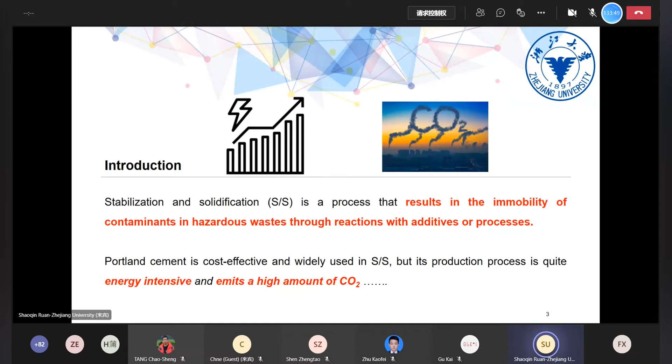So first about the introduction. As we all know, SS, or stabilization and solidification, is a process that results in the immobility of contaminants in hazardous wastes through reactions with additives or processes. And we all know Portland cement is very cost effective and widely used in SS. But its production process is quite energy intensive and emits a high amount of carbon dioxide. Nowadays we try to achieve the goal of carbon neutrality. So if we use too much Portland cement in SS, it is not quite environmentally friendly. So we should search for other materials that are low carbon.

And I will show you 2 figures first. First is about the materials flow of ordinary Portland cement manufacturing. First you need to get some raw materials to produce cement. I know it is quite boring, but I want to introduce this first. You need the lime, alumina, silica, and iron oxide. Then you need crushing, grinding, and blending to make the blended mixture. Then the very important procedure, that is calcination, and you get some clinkers. Then finally you add some gypsum to produce the commercial Portland cement products.

And we all know the carbon dioxide emission can be divided into 2 parts. The first part is the direct carbon dioxide emission. The second part is the indirect carbon dioxide emission. The direct carbon dioxide emission comes from the calcination of carbonates, the calcium carbonates. And the indirect carbon dioxide emission comes from the use of fuels. If we use some coal or some natural gas, it will produce some carbon dioxide.

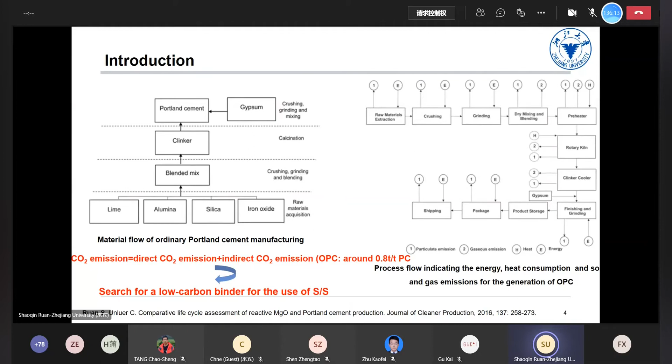And the second figure is about the process flow, indicating the energy, heat, or gas or solid emissions for the production of OPC. It shows the energy you need to input, and also the gases or solid wastes emitted during the production of OPC.

Here comes the question. Are these so-called low carbon binders or industrial wastes really low carbon? So here we need to use the very powerful method that we call life cycle assessment. Life cycle assessment can be divided into 4 parts. The first is the selection of the boundaries of scope and system during an LCA. The second part is searching for first-hand or second-hand inventories of a product or process. Then there is the evaluation of the obtained data using an impact assessment method. Finally is the interpretation of outcomes and providing recommendations for improvement.

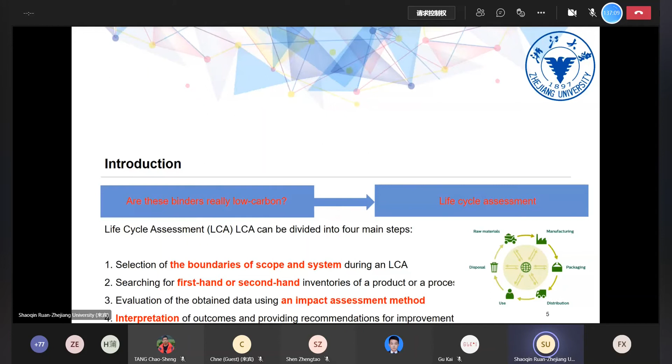So there are numerous methods that we can use to evaluate the environmental impacts of materials or procedures. The most widely used ones are Eco-indicator 99 and IPCC 2013. With Eco-indicator 99, you can get a number of midpoint categories such as climate change, radiation, and land use, and these environmental categories can be further categorized into 3 groups: damage to human health, damage to ecosystem, and damage to resources. After you get the endpoint results, you can weigh these values, and finally you get the interpretation. And IPCC 2013 is usually used to obtain the carbon dioxide emission during the production of certain materials or a certain process.

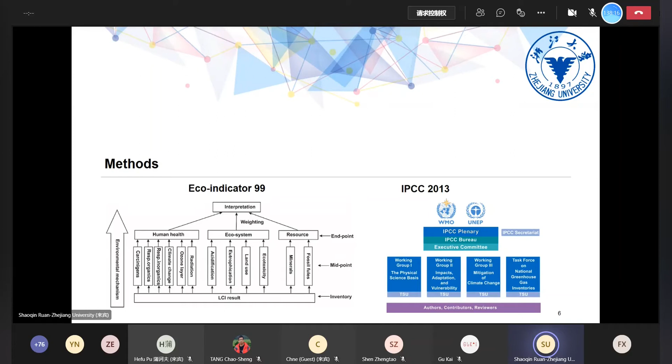So still, of course, we need to first talk about the ordinary Portland cement. This figure is about the normalized impact categories with respect to climate change set at 100%. As we can see from this figure, fossil fuels are identified as the largest impact category to produce OPC in the USA and Europe. But due to confidentiality issues, China's actual carbon footprint due to cement production is still not fully known.

So in terms of this, we have several measures to increase the sustainability of OPC, or Portland cement. The first is about energy type and efficiency. We need to increase this, for example, by using lower carbon fuel like natural gas. The second is we need to increase efficient grinding and conversion from a wet to a dry process. The third method is the replacement of out-of-date kiln lines or introduction of high volumes of supplementary cementitious materials.

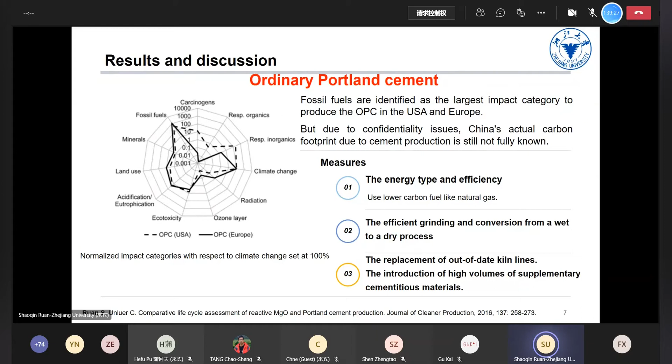Okay, so previous speakers also mentioned some binders like alkali-activated cement, and actually this type of cement is quite popular in my research area. Nowadays, numerous researchers have investigated the performance of alkali-activated cement, whether used in concrete or in S/S. So I want to give a very brief definition of AAC. Alkali-activated cement is considered to be a more sustainable material than OPC, which is produced by a reaction between aluminosilicate-rich materials and alkaline activators.

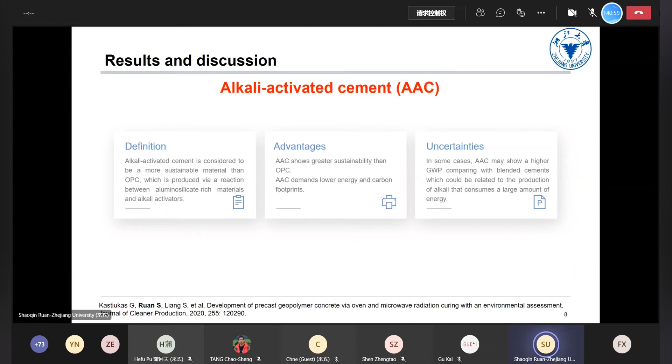In terms of its advantages, AAC shows greater sustainability than OPC, and AAC demands lower energy and carbon footprints. However, there are some uncertainties. In some cases, AAC may show a higher global warming potential compared with blended cements, which could be related to the production of alkali that consumes a large amount of energy. As we know from the definition, to prepare alkali-activated cement, you need a large volume of alkali, and its production process may be energy intensive. So it further adds environmental burdens to the whole process.

The second part is about magnesium-bearing cement. First, I will briefly introduce MgO, because MgO is the major component used in magnesium-bearing cement. Magnesium oxide is produced from the dry route, which is the calcination of magnesite. As you can see from this equation, it will produce magnesium oxide and carbon dioxide. The second is the wet route, which obtains MgO from seawater, brine, or rejected brine. You need some alkaline bases to produce magnesium hydroxide first, then you calcine these products to produce MgO.

But from our experiment, we find that MgO produced from the dry route has an advantage over MgO produced from the wet route in terms of overall sustainability. You can see from this figure, the left one, MgO from the dry route has a lower single score compared with MgO from the wet route. However, in terms of the dry route, the major magnesite production country is China. So if you want to use MgO from countries other than China, transportation is needed, and it will also lead to some environmental impacts.

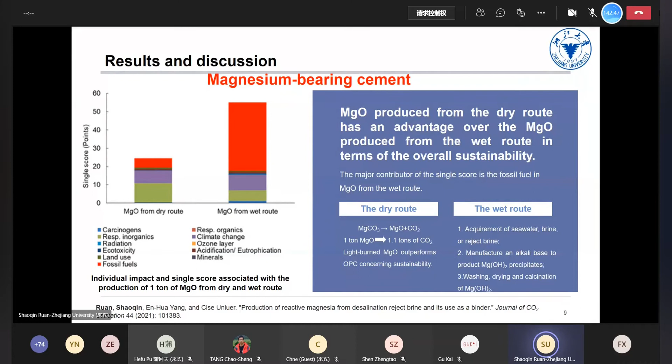Then, there are several types of magnesium-bearing cement, for example, carbonated MgO cement, magnesium-silicate-hydrate cement, magnesium phosphate cement, magnesium oxychloride cement, and magnesium oxysulfate cement. Magnesium phosphate cement, magnesium oxychloride cement, and magnesium oxysulfate cement all reveal rapid setting and hardening properties, which is quite useful in the process of S/S. So they are commonly used in a lot of applications.

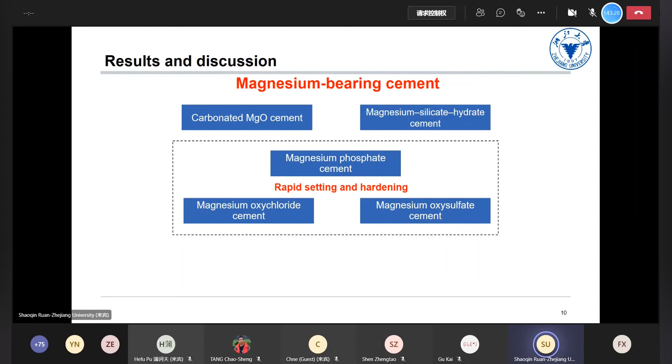First, about carbonated MgO cement, we published a lot of papers in this area. As we know, MgO cement acquires compressive strength via sequestering carbon dioxide. This leads to a reduction in pore volume and improvement of the microstructure. The carbon dioxide can be permanently captured in the form of stable hydrated magnesium carbonates. However, the carbon dioxide sequestration potential of MgO used in S/S in a natural environment is still unknown due to the lack of a geochemical model.

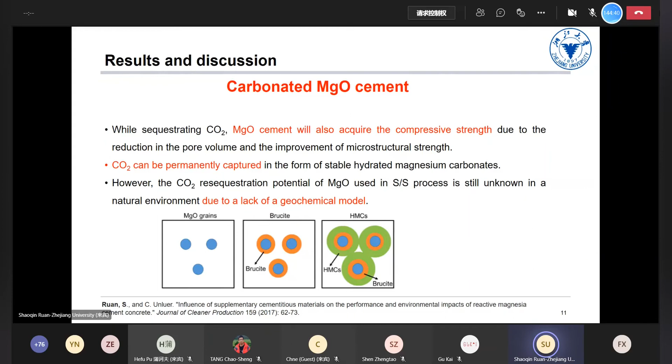And previous speakers also mentioned MICP. MICP is also quite a popular research direction in this area. It uses bacteria and some calcium-bearing salts, like calcium chloride.

Previously, we also conducted some research regarding the use of MgO in MICP. We introduced reactive magnesium cement and bacteria to produce hydrated magnesium carbonates to solidify these sands. The results are quite good, and I think it is a very promising field.

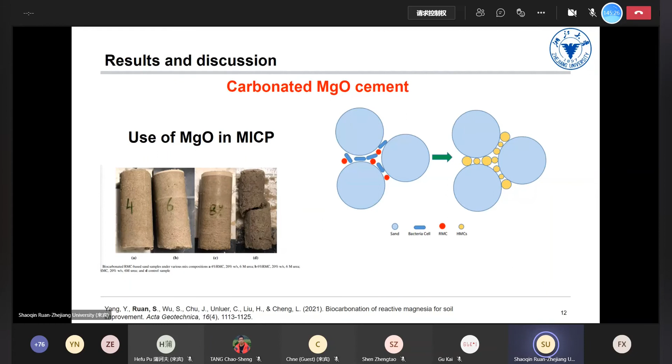Then there is magnesium-silicate-hydrate cement. Magnesium-silicate-hydrate cement can be synthesized by the reaction between MgO and a silica-rich source, such as microsilica and rice husk ash, in the presence of water. Sodium hexametaphosphate, instead of PCE, is used as a water reducer. However, when you use this water reducer, it may add additional environmental loads to the MSH binders.

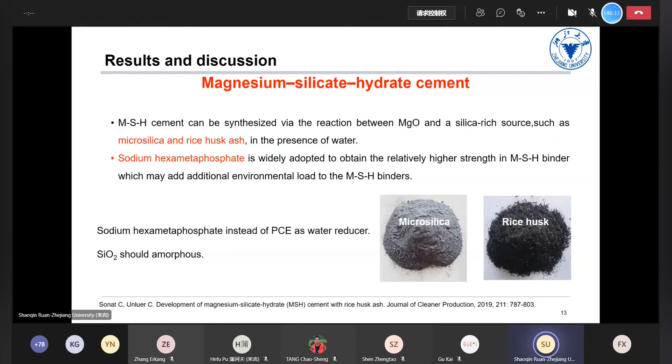In terms of solid waste, researchers normally use microsilica; however, some researchers also use rice husk ash as the solid waste to produce MSH cement. However, this silicon dioxide should be amorphous. If it is crystalline, the strength of the MSH is quite low, so it may not be very effective.

Next is magnesium oxychloride cement, which we call MOC. MOC is a type of non-hydraulic cement formed by the reaction between MgO and magnesium chloride. Several very important phases, like phase 3 and phase 5, are the major products formed at ambient temperature, which contribute to the fast hardening of the cement paste.

There's a study showing that over the past 15 years, carbon dioxide will be further recaptured into the MOC. It is found that the rate of carbon dioxide capture is about 0.07 kilograms per square meter of sample per year, accounting for 20% to 40% CO2 resequestration owing to natural carbonation over a 15-year time frame. This equation is about the carbonation of MOC.

So when you perform an environmental assessment of MOC, its carbon dioxide capture potential should also be taken into account to make it a more comprehensive evaluation.

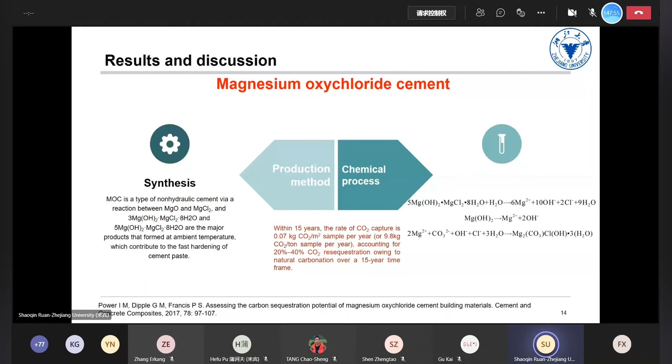Next is magnesium phosphate cement. We conducted several studies on its feasibility in 3D printing and found it's quite effective because it is rapid setting. MPC is also a type of ceramic formed via the reaction of monopotassium phosphate and MgO. The produced crystal structure is struvite, contributing to the rapid strength development in binders.

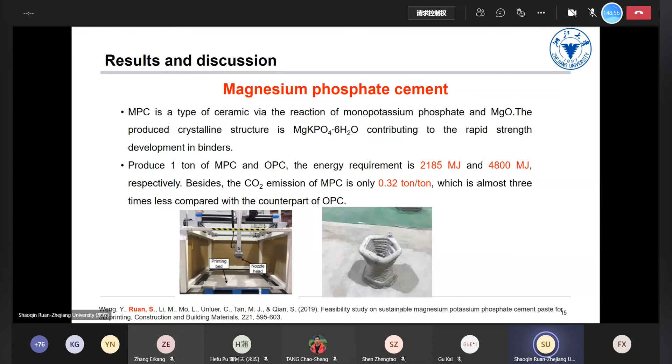To produce 1 ton of MPC versus OPC, the energy requirement is quite different; the energy requirement of MPC is much lower compared with that of OPC. The carbon dioxide emission of MPC is only about 0.32 tons per ton of MPC, which is almost 3 times less than its OPC counterpart.

Next is magnesium oxysulfate cement. It consists of MgO and magnesium sulfate. I performed several evaluations regarding the overall sustainability of MOSC and OPC. We found that the ratio of MgO to magnesium sulfate is irrelevant to the final environmental impacts; they're quite similar. The overall sustainability of MOSC is comparable with that of OPC, which means it is not very sustainable.

In terms of carbon dioxide emission, an interesting thing is that the production of MOSC emits much more carbon dioxide compared with OPC, which means if you want to achieve the goal of carbon neutrality, you should not use MOSC. Instead, you should use OPC. Maybe it's cheap and it is widely used. So MOSC may not be very favored in terms of carbon dioxide emission.

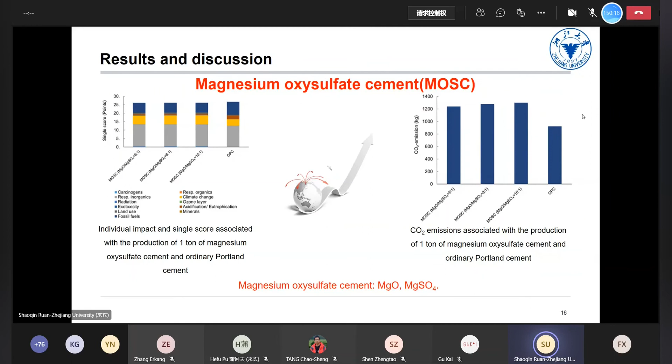That is the calcium sulfoaluminate cement. And maybe I mentioned in the previous slide that in terms of OPC production, you need to calcinate the limestone, that is calcium carbonate, which emits a lot of carbon dioxide. But in terms of CSA, a source of sulfur is needed in the manufacturing process, and an additional source of aluminum oxide is required due to the limited source of bauxite, which adds to the environmental burden due to their mining and refining. So the sustainability of CSA is highly dependent on the local or regional availability of bauxite.

But in terms of its advantages, of course, it has a lot of advantages. For example, its production emits less carbon dioxide than OPC, because you don't need to calcinate the limestone, that is calcium carbonate. So the direct carbon dioxide emission is much lower, which leads to lower overall carbon dioxide emission. Meanwhile, the manufacturing process efficiency of CSA is much higher compared with OPC. And with the use of industrial waste, the cement is more effective in the process of CSA sustainably.

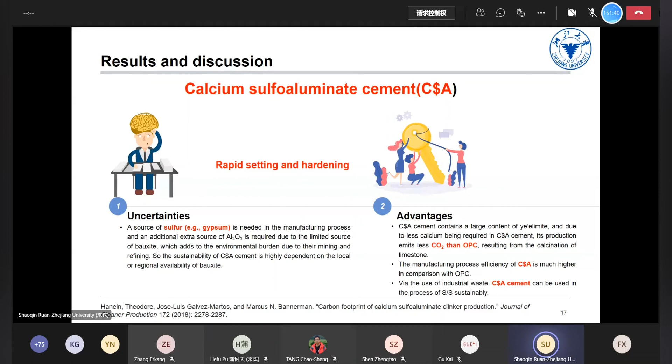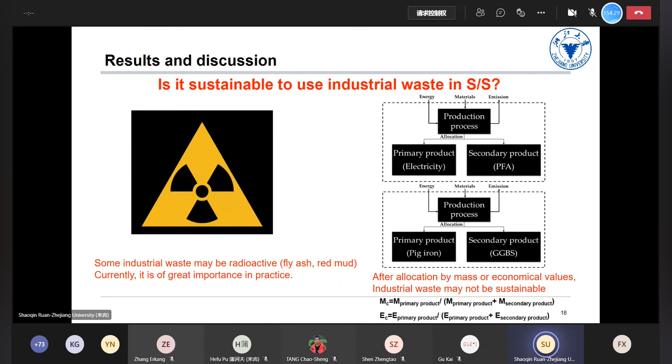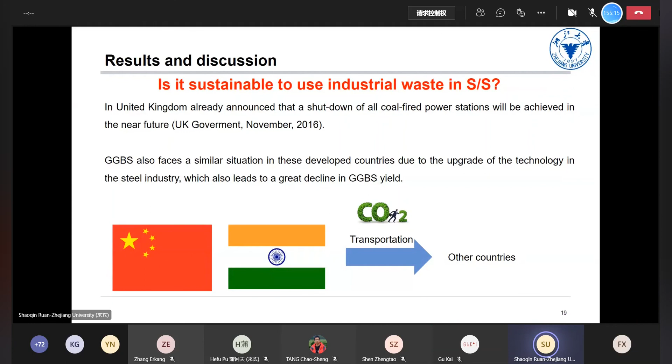Okay, almost finished. It also faces a similar situation in these developed countries due to the upgrade of technology in the steel industries, which also leads to a great decline in GGBS. So nowadays, China and India are the major countries that produce fly ash and GGBS. So if you want to use these materials in other countries, the carbon dioxide emission associated with transportation should also be taken into account.

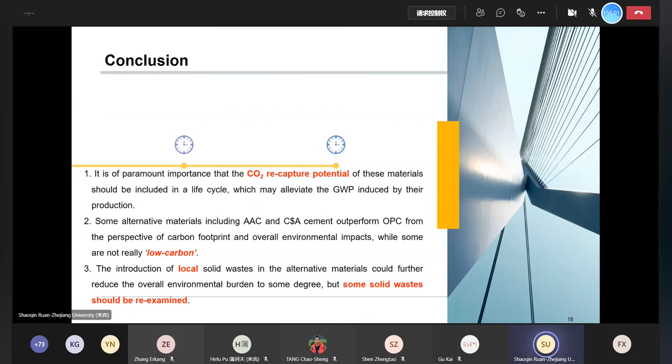So finally, the conclusion. First, it is of paramount importance that the carbon dioxide recapture potential of the materials should be included in a life cycle, which may alleviate the global warming potential induced by their production. Secondly, some alternative materials, including AAC or C$A cement, outperform OPC from the perspective of carbon footprint and overall environmental impacts, while some are not really low carbon. Thirdly, the introduction of local solid waste in the alternative materials could further reduce the overall environmental burden to some degree, but some solid wastes should be re-examined. Okay, finished. Thanks.